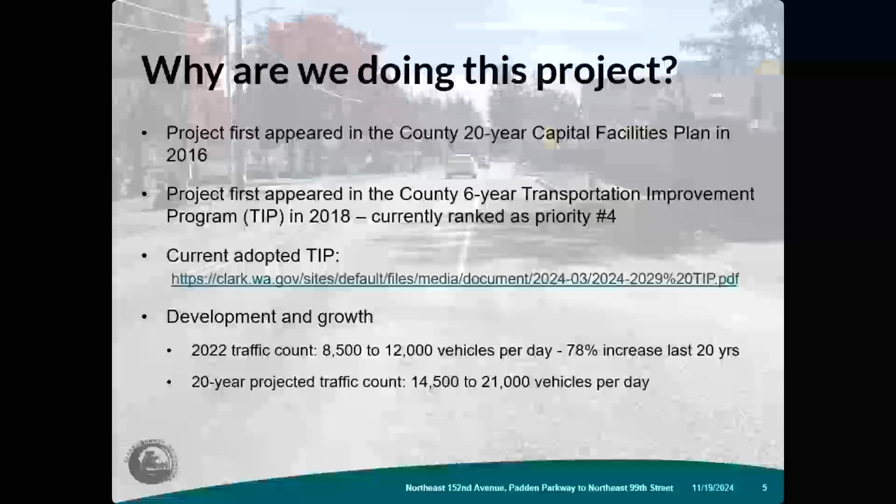Additional reasons for this project are for safety. Currently, this road does not meet our infrastructure standards for its road classification. We're adding left turn lanes to reduce backups and conflicts at 99th Street, and we're adding a left turn lane at York Elementary School as well.

We want to provide multimodal access along the whole corridor and at the major intersections and everywhere along the corridor. This is a major network connectivity project for north-south traffic patterns, especially for areas to the north.

We are generally in favor of increasing our system reliability, transit access, and freight movement as well. These are some of the criteria that get evaluated when projects are ranked within the TIP.

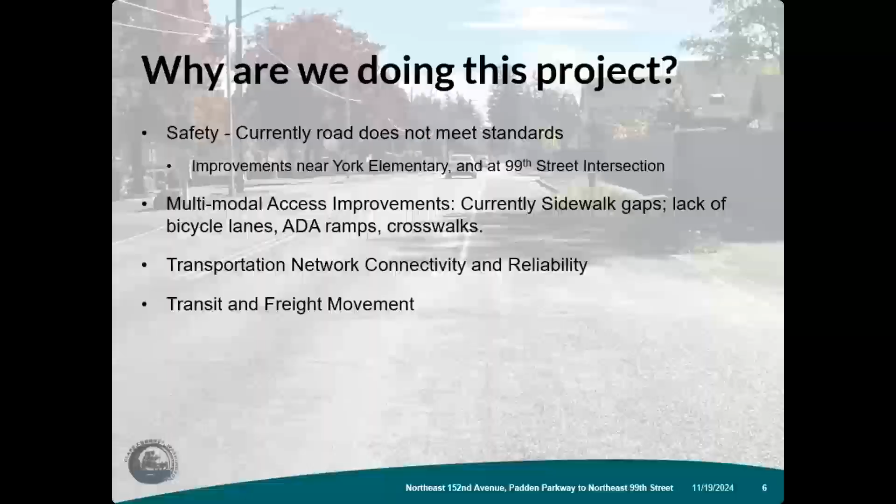Okay, I just have a map of the location in case you don't know. Here we are in the northeast part of the Vancouver area, and our project is about 3/4 of a mile long.

This doesn't really show, but we do have some work, shown as a short blue line, on 99th right there too.

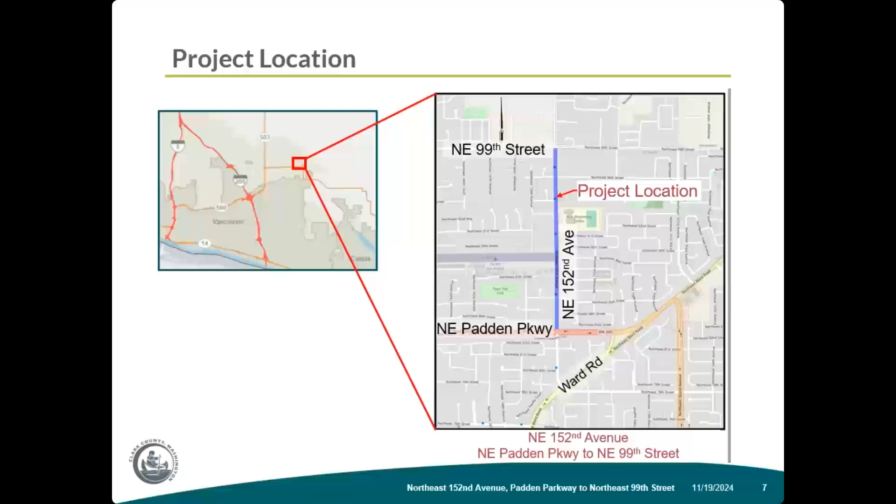Okay, so as an overview, our roadway classification for this section of Northeast 152nd is known as a C-2b. That means it's a 2-lane collector, and it should have continuous bike lanes and sidewalks.

The classification defines the number of lanes and the minimum lane widths, and it establishes, of course, that we need to have the bike lanes and sidewalks.

So we are adding a left turn lane at the North School entrance, which is right there. Haley, you can click my little animation if you want to be fancy.

And we are adding 2 new pedestrian crossings with flashing beacons along this corridor as well. One of them is at 85th Street.

I'm going to click it. And one of them is at the school, a little bit south of where the current pedestrian crossing is.

And of course, we have our new traffic signal going in up here at 99th Street with left turn lanes and protected turn arrows on all 4 legs of the intersection, as well as new crosswalks.

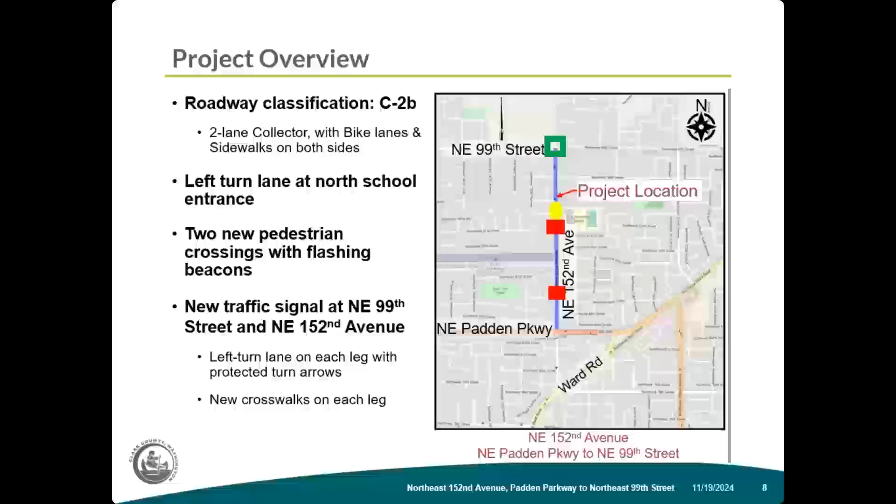Another improvement for this segment of the road is stormwater collection and treatment. Right now there's kind of a hodgepodge of old stormwater collection systems out there, and we're going to upgrade that and add some pre-treatment to it, with new inlets, new pipes, and what's called infiltration trenches to collect the stormwater and treat it as well.

We are adding curb ramps and sidewalks that are compliant with the Americans with Disabilities Act where necessary. We're trying to keep as many of the existing ones as we can where they are already compliant and in a workable location.

We're also working with the city of Vancouver to add a new water pipeline, which is an upgrade for their pipe network. I believe it's for helping with pressure problems in their pipe network, as far as I understand. The existing water main is not changing and will remain in service, so there's no anticipated interruption to anyone's city water service along here. The new pipeline is only for transmission, and it'll connect to their existing network.

As far as the schedule, we are currently set to advertise the project in mid-March of 2025. We intend for our contractor to start construction in June 2025 and continue for approximately 17 to 18 months, until December 2026. We're not planning on any winter shutdowns.

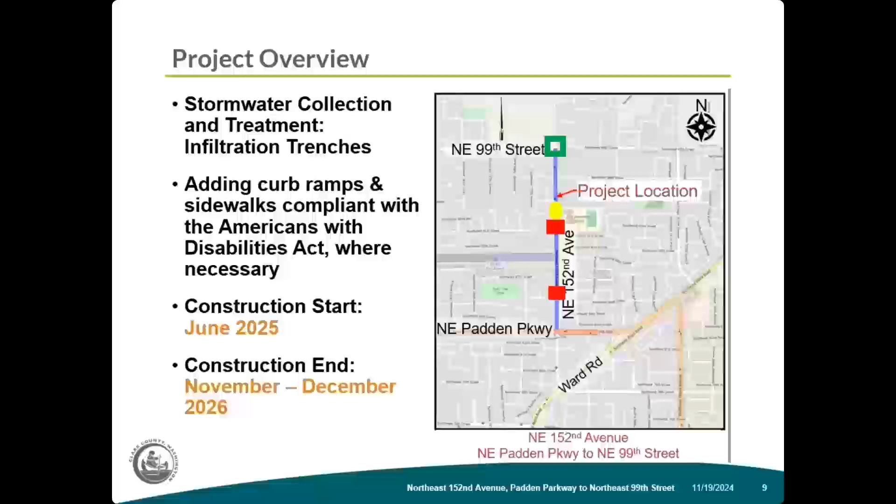I just have a couple pictures of what it looks like out there now. If you're not familiar, we have sections with no sidewalk, or sidewalk on one side but not the other. The lane widths and shoulder widths are varying, as well as the striping. We have inconsistent curbs and ADA ramps, and there's random grass growing in the shoulder.

This is the crosswalk at York Elementary, which you can hardly see. It doesn't have any lighting. That's all going to be part of our improvements.

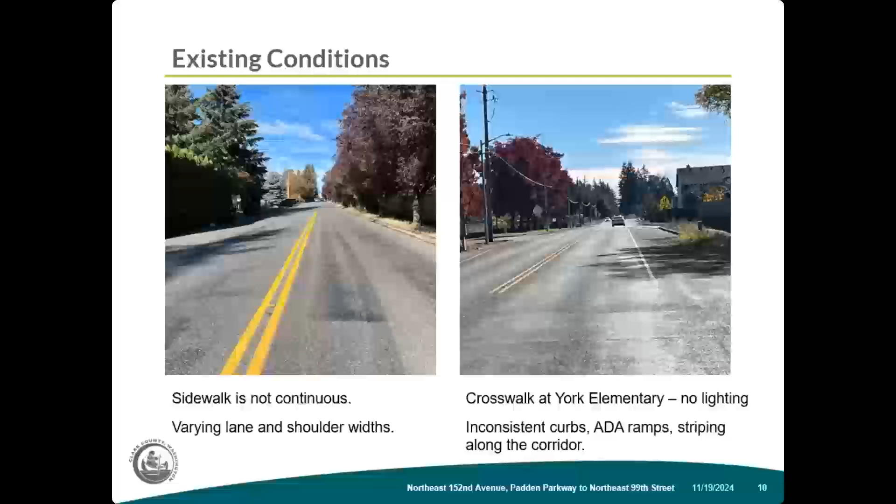I have some diagrams showing what an infiltration trench is. This is a cross section of an infiltration trench. You could think of it sort of as a really big French drain, but it's a little more complicated than that. It's 6 to 10 feet wide, and the trench is 10 to 13 feet deep in total, with a 6-foot section of coarse gravel backfill to allow for storage of the stormwater. It allows time for the water to infiltrate into the groundwater, and it gets treated naturally as it does that.

On the right I have a clip of our roadway plan at the intersection with 99th Street. We're adding a section of new sidewalk here and reconstructing some ramps as well. You can see where we have infiltration trenches on all four segments of our roadway.

I thought we were going to have a full set of plans here tonight, but they are posted on our website if you want to see more detailed drawings. They're available, or you can just ask later on, or email me.

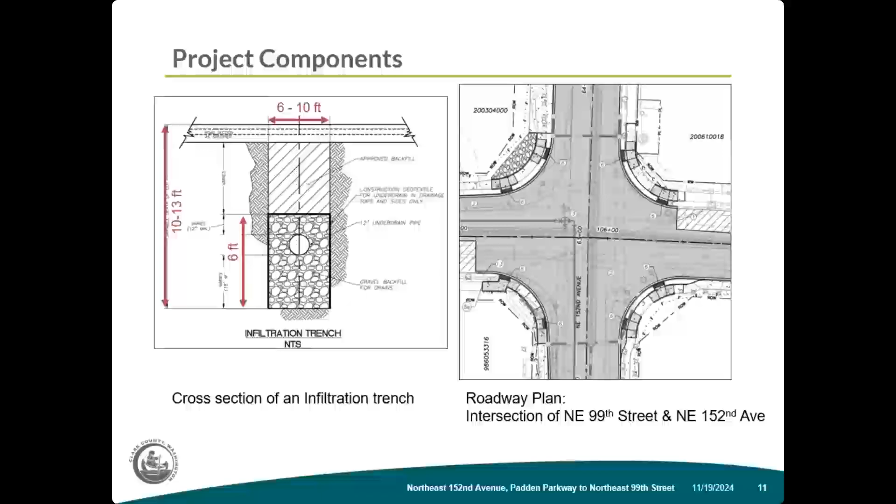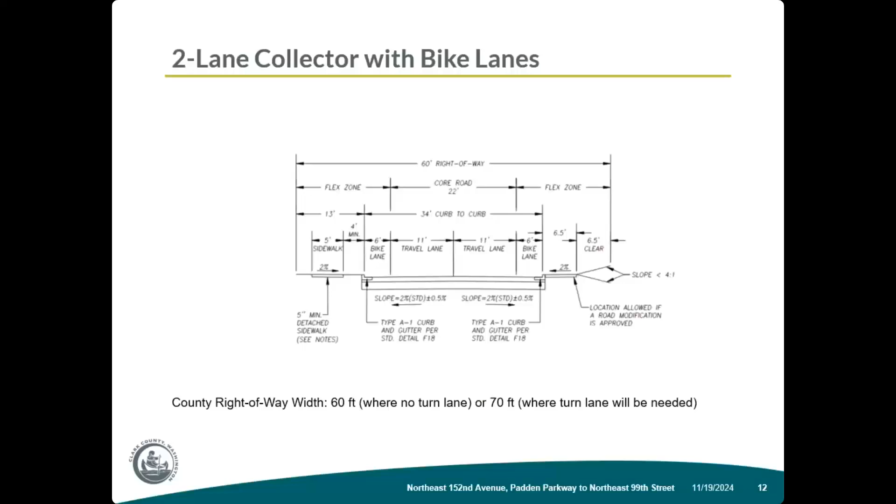Okay, we're going to talk about the closure and traffic detours for a little while. The traffic routing during construction has basically two components: one is the larger detour for through traffic, and the other is a different method for handling local traffic, meaning necessary access to residents and businesses within the neighborhoods directly adjacent to the project area.

There's going to be signing at both ends of Northeast 152nd, at Padden and at 99th Street, saying road closed, local traffic only, throughout the duration of the work. This is intended to route all non-local traffic onto the Northeast 137th Avenue detour. That road has a higher classification, I think it might have a center turn lane, but it has wider lanes, and we don't have any worries about it handling the extra traffic for this project, thankfully.

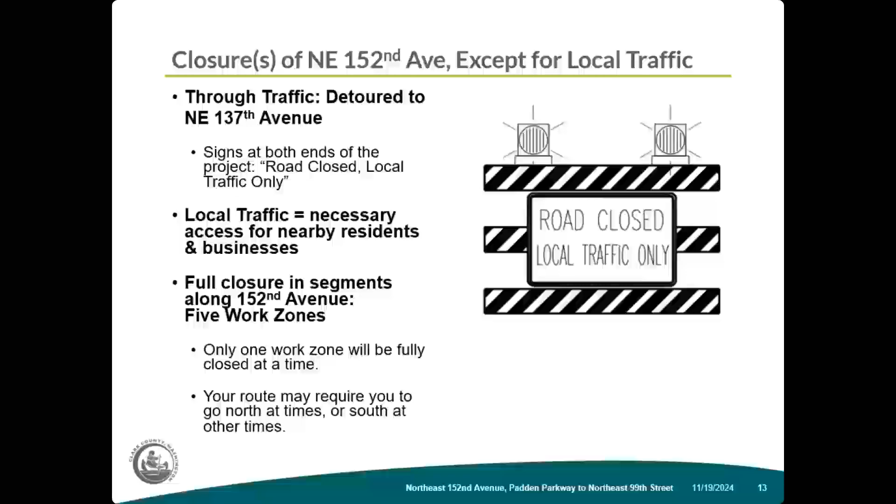We have that available. So I have a bunch of graphics for how we're going to phase this work. This is kind of a busy slide, I apologize. We'll look a little closer at it. For work along 152nd Avenue, we are using work zones, and only one work zone at a time will be fully closed.

When work is happening in each zone, access from the side streets within that zone is going to be closed, and any residents or businesses within that zone requiring access directly onto 152nd are going to be directly coordinating with the county construction manager. Within each zone, we're requiring our contractor to complete the major work, like major excavation, backfill, and initial paving, before they can reopen that zone to traffic and close the next one.

So if your driveway enters directly onto 152nd, it's still going to be fully accessible to you, your mail delivery, your garbage truck delivery people, etc., but only whenever there is not active deep excavation or pipe installation happening right in front of the driveway.

The first work zone we're planning, we're requiring our contractor to start in front of York Elementary School, and we are requiring them to finish that work while school is not in session, so that we don't have issues. We've been working with the school for a while now on how to make this schedule work and get the work done that we need in front of their school. There's no other driveways in front of that section, fortunately.

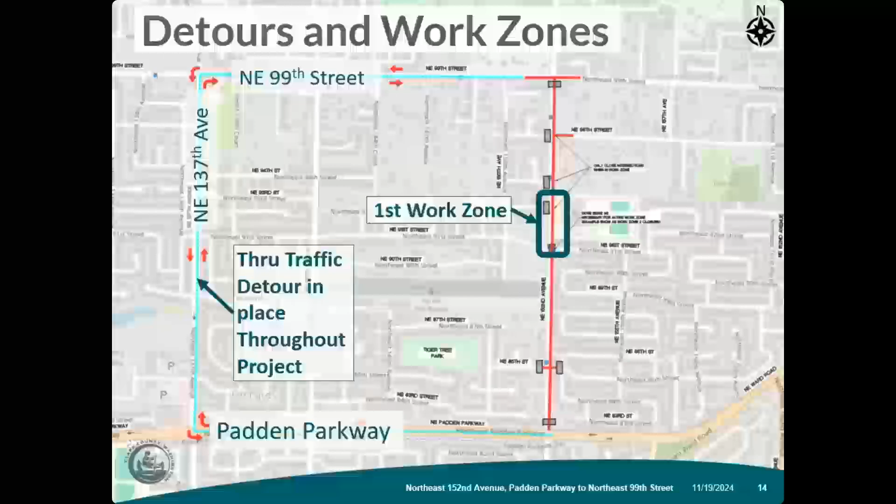I already talked about our first work zone; this is a close-up of that with a little more detail. All the access from 91st Street on both sides is closed at the very beginning of the project, and from 93rd Street is closed, but 94th Street is open and 85th Street is also open. This is a big subdivision, so if you live down here, you're going to be affected if you need to get out and go north. The easiest way to do that would probably be to go out to 162nd Avenue and go north.

Otherwise, I think people can get out and go north, then go over to 137th and go south to Padden. That's the way this one would work. There's no driveways directly accessing 152nd in that section.

The next work zone, I don't know for sure. We've set up our schedule assuming it's feasible for them to work in this order, but we won't require our contractor to do these work zones in this order necessarily. They can choose a different order if it provides efficiencies, since we don't want to put excessive restrictions on their schedule, which can lead to higher costs. But we will know their schedule at least a month in advance, so we'll be able to coordinate and keep everyone informed as things progress. We're showing it in this order tonight, but it very well may not be the actual order the work is done in. We do know the section in front of the school is first.

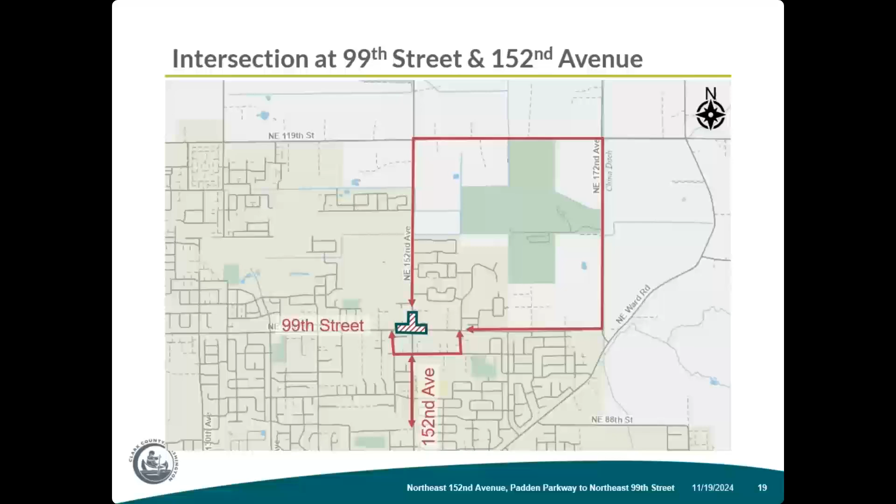Okay, I have a little bit more information now that we finally got through all the detour information. There's a lot there. Basically, I wanted to let everyone know we have the environmental permitting for this project completed and issued to us. We've had a very straightforward process in that regard. We had a categorical exclusion signed by the state, and there was not too much involvement there, I guess.

We're going to be planting some new trees and shrubs to maximize sight distance. Those will be lower vegetation than what's out there now in a lot of places. And C-Tran currently has 4 bus stops along this corridor, so they requested that get reduced to 3 bus stops, with 2 of them combined. They also requested that we add some stops. I don't think they'll be signed yet, but the concrete will be there for future northbound bus routes if and when they expand their network.

And we have new intelligent traffic systems infrastructure that's going to connect our new traffic signal to the other traffic signals in the region. There's fiber optic going in along the whole corridor that will make that connection between ours and the state's, so all of our regional traffic systems are connected to each other for timing and everything. And then we have some utility owners, such as Northwest Natural, Lumen, and CPU Electric, doing some relocation work in the coming months that you might notice. I don't know when any of them are scheduled to start, but we know several of them want to get it done before our contractor is out there on site.

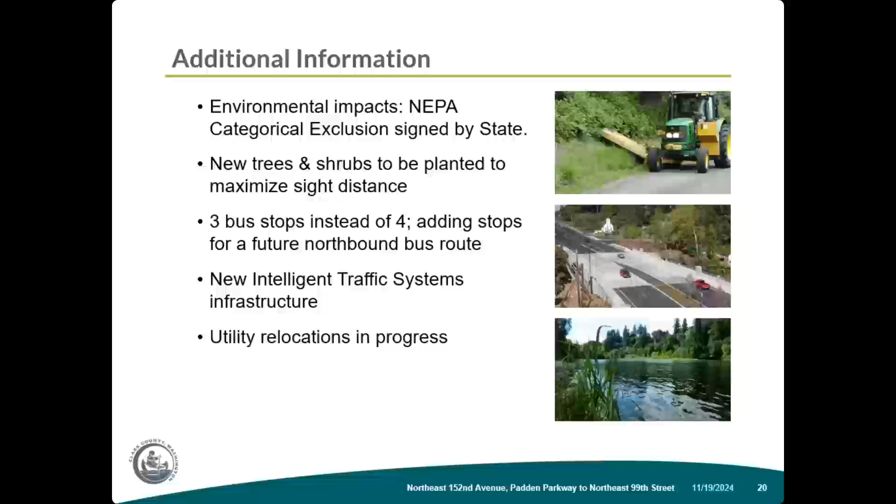I also wanted to share some information about the funding for this project. We have 2 large grants providing some funding for us. One is a federal grant from the Surface Transportation Block Grant, $4 million, and one is a state Transportation Improvement Board grant, $3.5 million. So we're very grateful for that. The city of Vancouver is providing almost $2 million for their new water pipeline and sewer extension, an extension of their existing sewer line that's about 150 feet long. And the county funds are the remainder of our funding. So that all adds up to $12.8 million right now.

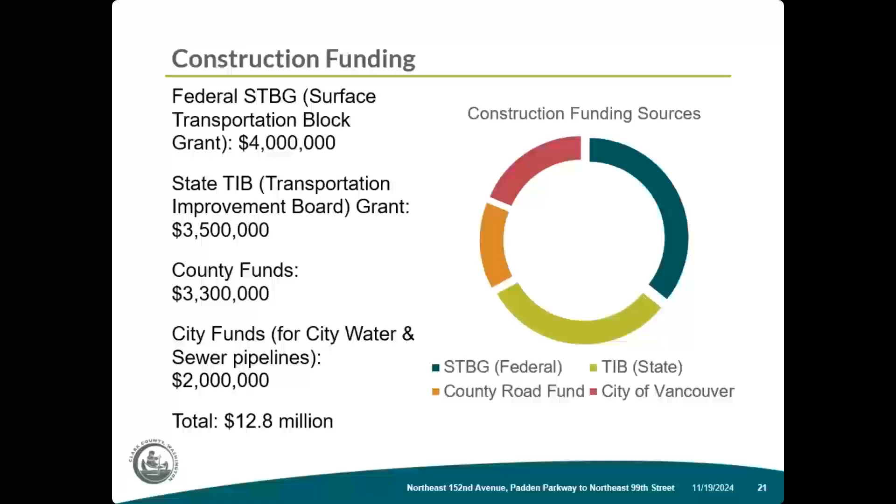We don't want that number to go up. Okay, I'm at the end of my slideshow. Thank you very much, and please email me or let me know if you have questions. And I think we're going to move into the Q&A now.

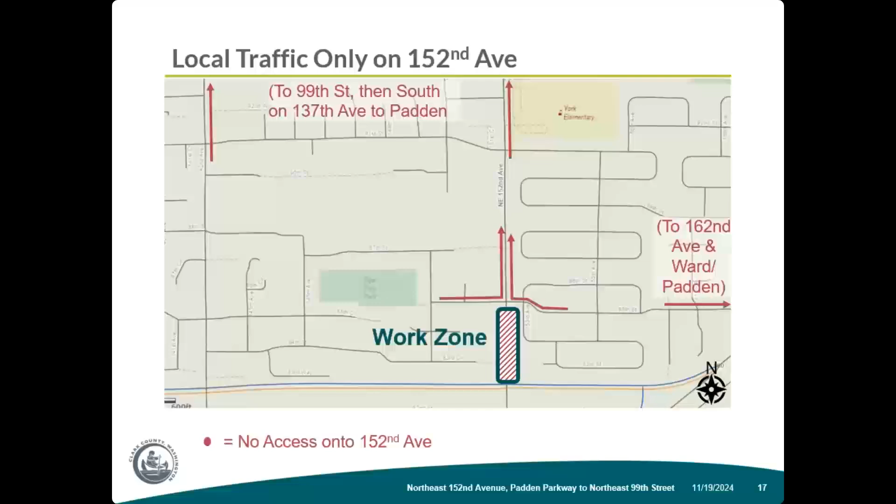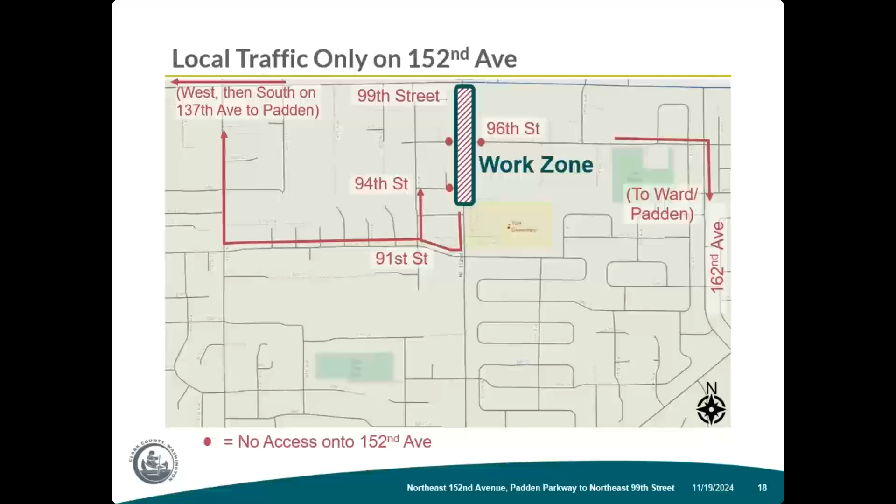If that makes sense—no, that actually makes sense, but it doesn't help the problem, it's actually the worst. That precise issue: the minute people have to get off 137th to come back around, they are going to drop right onto 150th at 40 miles an hour, which we just brought up.

And they're going to come zooming through 150th Avenue because it's a long straight stretch—you can jump off and hit anything much quicker than coming all the way around. We have no signals, no signage, nothing. We already have the problem now, and you haven't even blocked 152nd. Nobody's going to want to go all the way to 137th—they can drop through and scoot out.

As far as the neighborhood traffic goes, it's not just the neighborhood, it's everybody. They have to get around and they don't want to do the four-way stop. They just want to get around. So it's a big one.

Okay, so for clarification, I think you're talking about traffic coming west on 99th Street and wanting to go south on 152nd, either way, to get around. They come from both ways, going down 150th. If they're going east, they can get on, already east of 137th. They cut through 150th and come on 91st and just keep going south.

That's a concern for clarification, right? I just want to make sure I understand. So I don't know if we should talk about the detour plan here. We appreciate the official detour not going down that street. Yeah, we don't want to do that.

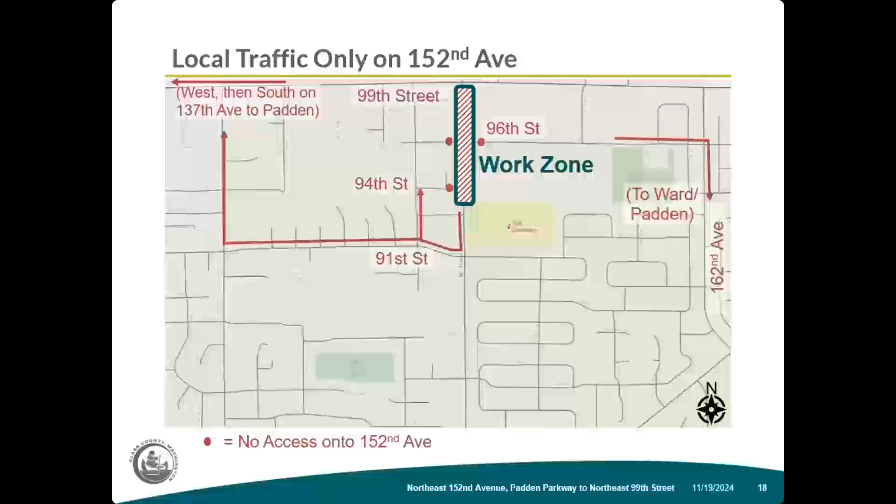You're not adding any lanes of traffic, no, obviously, as part of this project.

Okay, any more questions? I do have a follow-up question. Okay, I'm going to bring you the mic so everyone can hear.